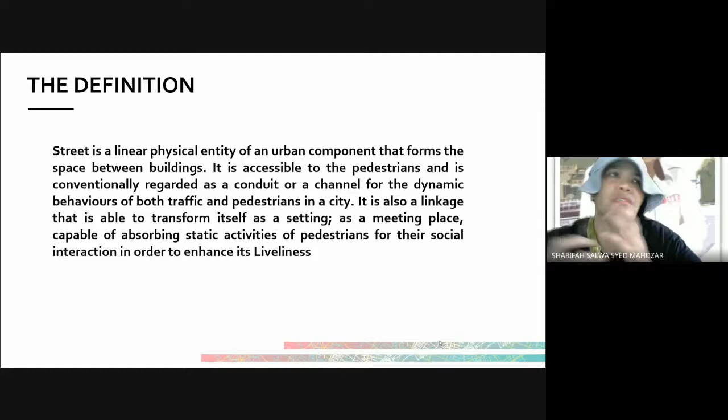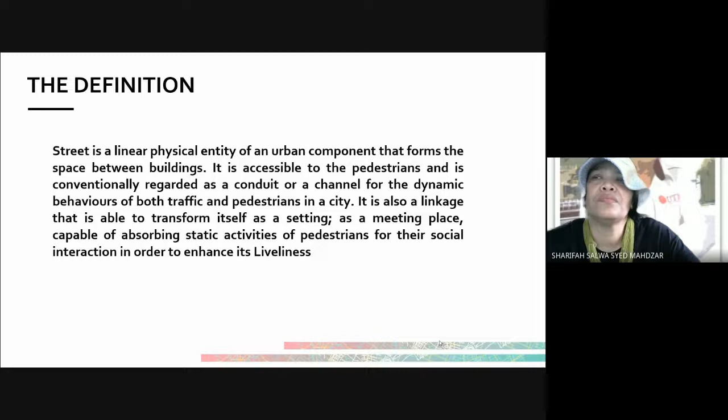Space in between buildings, in between alleys, in between built forms, whatever the built forms may be. Normally we regard streets as a conduit, a channel for the dynamic behaviors of both traffic and pedestrians. But to me, it is also a linkage that is able to transform itself as a place, as a meeting place, absorbing a stationary pattern of activities, and accommodating in order to make it livable.

So, methodology in my work - I think Ms. Shakira also has taught you this methodology using space syntax. I also use space syntax, a very basic one. Those doing research use a bit more than that, but for my masters group, not bachelor, just normal masters of architecture, not research based, it's a very simple approach. We use space syntax, as my work also focuses on static activities. So I integrate space syntax with static activities.

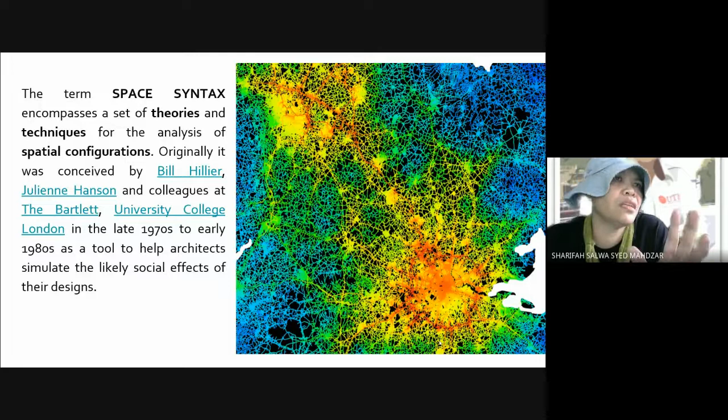I don't think I need to go much into it, just very briefly: space syntax, as taught by your lecturer, is about theories of spatial configurations. I call it a network of things. People talk about this, but in terms of understanding it through the prism of space, not much had been done until late Professor Bill Hillier, Professor Julienne Hanson, and the group at UCL formulated and produced this technique.

Again, network - as the word may sound itself, network is always about fragments. It's always about things that can be broken down, spaces that can be broken down into components. So that's network - in the end it becomes components. That's the kind of theory behind space syntax.

So because of that, there are three main conceptual conceptions of space according to space syntax. The first one - can you see my cursor? People move in linear space, people move in a convex space, and there is always a visual field that a person has already established once one is actually located, having been himself or herself in that space. So already generated a visual field - that is actually the isovist.

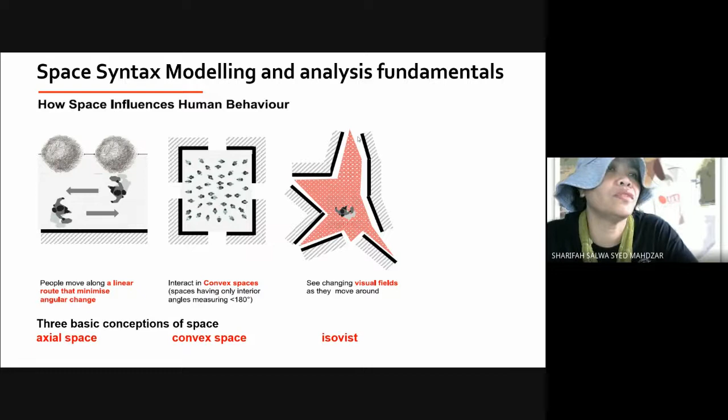All right, so very, very basic work - spatial network analysis of cities in Malaysia. Because I'm from Johor Bahru, I'm currently in Johor Bahru. It's the very basic one, Johor Bahru. This is an old map - of course I have the latest map with more sophisticated spatial data, but this one is very basic, just a general one to see.

This is our main road, Jalan Wong Ah Fook, of course in the district of Johor Bahru. One thing I'd like to highlight - Jalan Wong Ah Fook is the main street in Johor Bahru city center. Along it there is also Sungai Segget, or Segget River, the famous one - those from Johor know this. Now they're doing kind of a renovation.

But what actually excites me on this issue is when I gave a lecture to secondary students, not locals - let's say from Singapore. The lecture was in UTM Johor, and I asked them, 'Do you know the river Sungai Segget, the Segget River of Johor Bahru?' They said, 'What do you expect?' They said no. 'Do you know City Square?' City Square is the shopping mall. 'Oh yeah, okay.' And Segget River is just next to it actually.

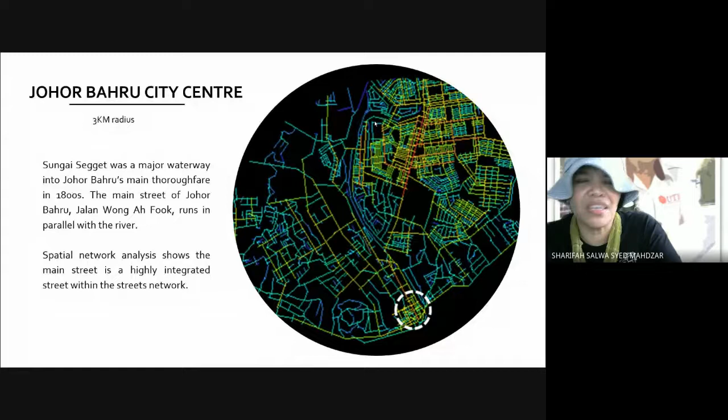So this is what I'm saying about how we design our streets. This raises questions that come back to us as designers. That's why I want to show this: Wong Ah Fook has a very highly integrated street space, but yet Sungai Segget is just next to it, and people do not see, cannot recognize, do not even know the Segget River exists running in parallel.

So this is just a very, very basic GIS analysis - how do you pronounce that? Anyway, this one is a GIS analysis on the Kuala Lumpur city center. Very basic analysis, 5-kilometer radius. We did a spatial analysis based on facts from the Kuala Lumpur city center itself. Just a GIS, 5-kilometer radius - you can see very generally here.

This one is Jalan Tun Razak - where is it? Trying here, it's somewhere there. Oh okay, I think this one is actually KLCC itself. Now you can see this one.

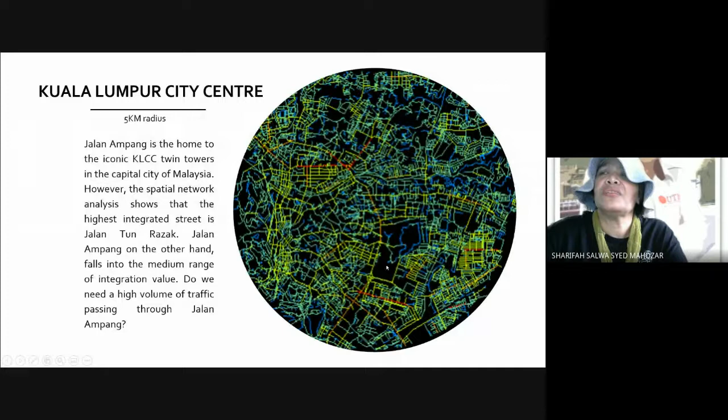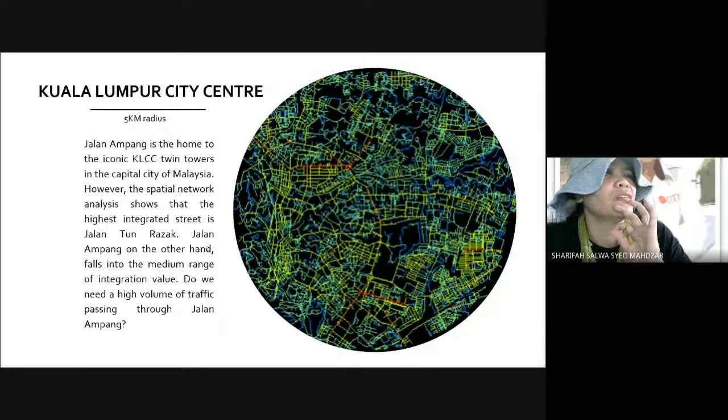So this is Jalan Tun Razak, the question. We see that Jalan Ampang is not so red in this case. During the spatial analysis, we can question whether we will have high volume of traffic on Jalan Ampang. Many of you are in Kuala Lumpur and know how crucial Jalan Tun Razak is. Is Jalan Ampang as crucial as Jalan Tun Razak? Is it the same level of crucial to address traffic? So we can question this as designers. This is what I question from the very basic spatial analysis.

And of course, next to it, as you all know, there's Kampung Baru. Next to it is KLCC, and this is Kampung Baru. Along Kampung Baru itself, we can see several networks which are highly integrated. I believe this class is already familiar with space syntax - yes, Miss Shakila? Okay. So here in Kampung Baru, we see that Jalan Raja Muda Abdul Aziz is a high integrated street, as well as Jalan Raja Abdullah, which is lower - I think the value is a bit lower.

So again we question: do we want, when we have this kind of secondary street, not necessarily primary, but serving as a primary when it comes to serving people - as far as people are concerned they're quite primary, but in terms of the context itself they can be secondary - do we want to have the same volume of traffic in the primary and secondary streets?

So, okay, my Jalan Ampang case study. Therefore, when you question this, I'm advocating making Jalan Ampang a great street of Malaysia - yeah, from my work.

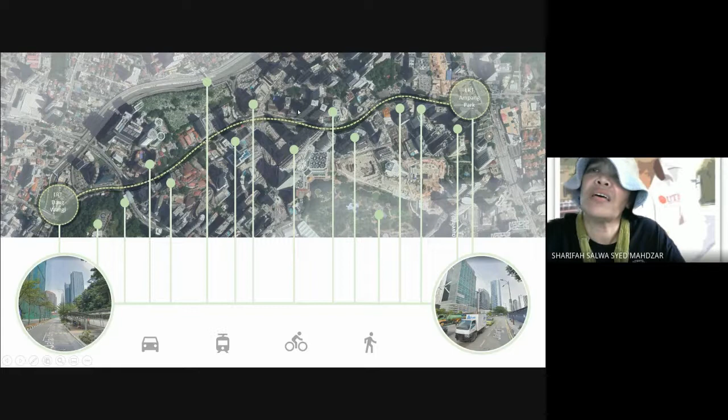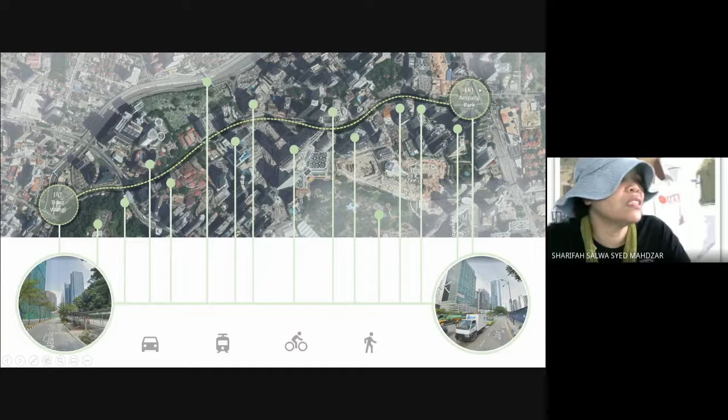So this is Jalan Ampang, the one I've been focusing on, as always from LRT Dang Wangi. There, Jalan Gunus, Dang Wangi Station here. Further down a little bit is where Jalan Gunus is, I think - no, sorry, I can't remember. It's where AIA is actually. Renaissance is here - or is it Renaissance? I think Renaissance is here. Jalan Sultan Ismail somewhere, and then this one is Ampang Park. I'm sorry to say that we no longer have this Ampang Mall - the 70s design being knocked down, which is quite heartbreaking. But anyway, can't do much for now.

So that's the stretch. Looking a little closer, this is axial analysis of the corridor. I'm not using the more sophisticated measures like choice, angular analysis, or segment analysis for this one - bachelor level, I suppose this is enough just to give you an idea, even for my presentation. We can see all this - very straightforward, empirical analysis that gives you a foundation of understanding how the network structure is within a certain urban context.

So this is Jalan Ampang again, and Sungai Kelang over there, Sultan Ismail over there, etc, in 2020. Coming closer, we look at the area - Jalan Ampang is up at 2.59 over here. So we can look at the integration value of this one, of many of the several streets - primary, secondary, and tertiary streets around the area.

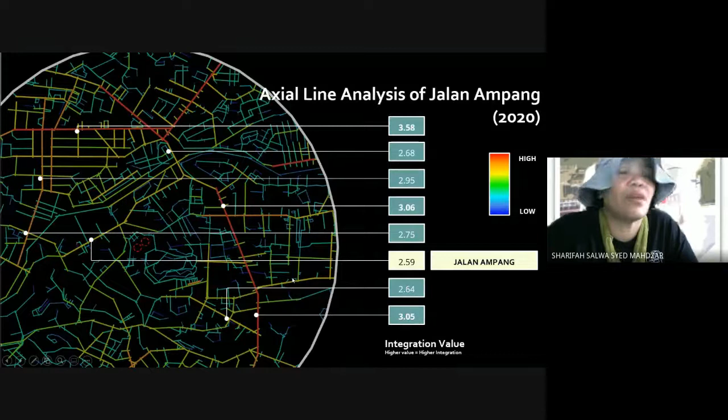Okay, so because of the spatial analysis of network, space and time, we compare. I think it's easy for us to compare the structure of the network of space during those times using archival materials, and we can also compare them to the current condition. Currently we look at 2020 and compare to 1957. I think in 1957 we saw that Jalan Ampang is actually quite high - the integration value is very high. However, in 2020 we saw it's actually quite low.

So that kind of limits the connectivity, hence limits the social interaction, hence limits the social encounter, co-presence of other people, something like this. So that's the analysis, a very basic analysis that we found.

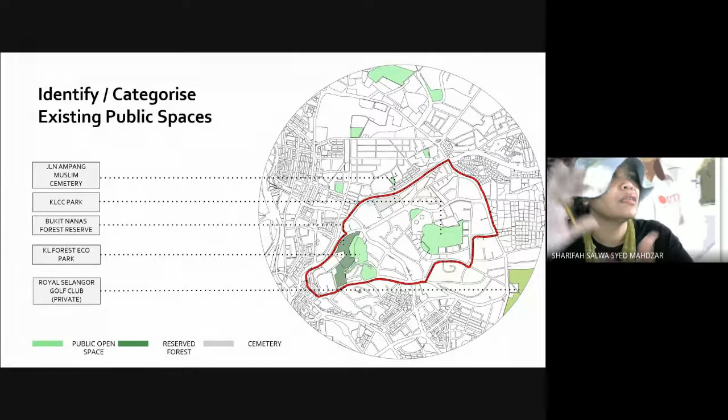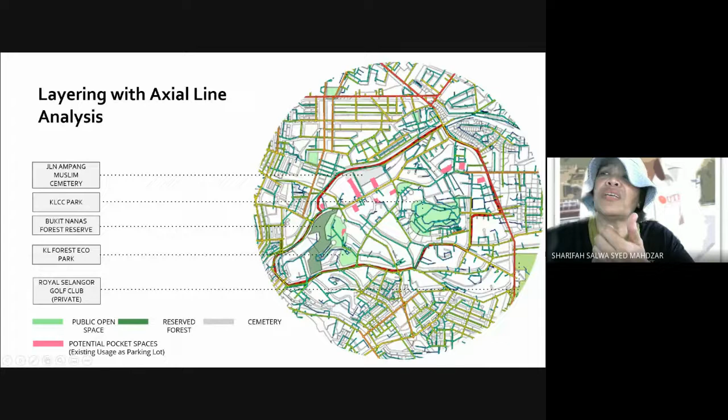When we do this spatial analysis, of course, we can also overlay. I think planning students also do this, right? You layer the analysis. Now we layer the analysis with the public open space, reserve forest, cemetery, and we can layer all these pocket spaces, and then we layer them as well with this axial analysis. And then we can also find the potential pocket spaces that we can develop further in order to enhance the sociability and balance with the accessibility of the streets.

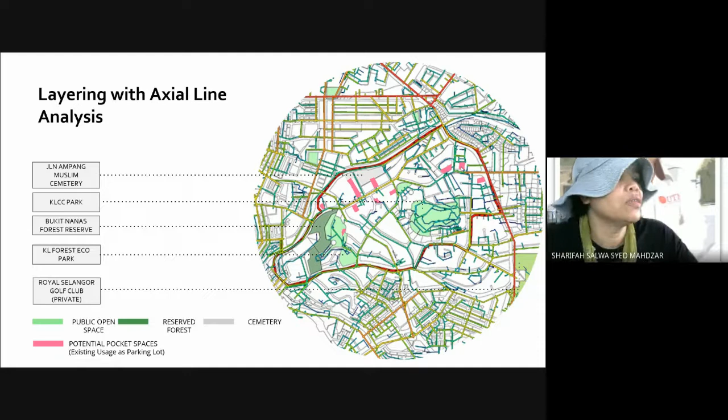Again, when we do that, we do have the synthesis. As architecture students, I think Dr. Miss Shakil also mentioned the planning students now start looking at the 3D dimension analysis, or 3D interpretation of the space they are dealing with, rather than looking at the space, looking at the map in 2D, trying to look at it in 3D. So this is what we are doing as well.

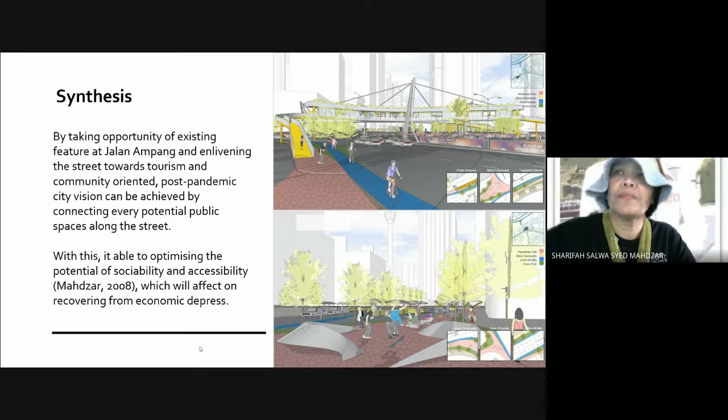So in doing that as well, it's not easy to get this balance. So how do we get this balance between the sociable and the accessibility? Of course, there is a school of thought on understanding streets and everyday life. It is about understanding everyday life rather than streets -- I put streets there, that is my word. It is about understanding everyday life. If you read, there is a kind of school of thought on that.

Therefore, I go on to the static activities. I think we can see this more often. Correct me if I'm wrong, but I think people in streets watch other people, right? I think this is just taking further from what William Whyte mentioned in his book, Social Life of Small Urban Spaces. People watch other people, whether directly or indirectly. But these are static activities, and they are very, very subtle.

A lot of these measures that we come up with, walkability index, etc., are majority about walking behavior rather than static activities. So I am looking into static activities to integrate with a spatial network analysis.

Static observations -- to imagine people watching other people. This one is literally watching other people using a telescope, things like this. And people meeting other people, and I don't know what this person is doing, I think he's just enjoying himself. Whether we can still do that, I do not know. In streets, urban spaces, kids playing, we don't know -- yeah, these are all imagination. It's like what Einstein said, we have to be great in our imagination.

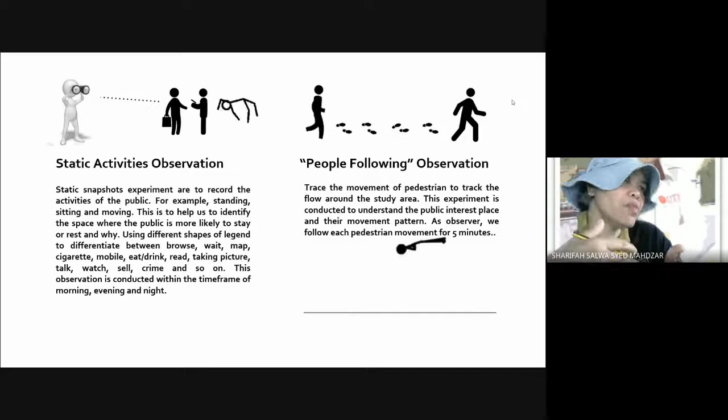So static observation, we map them out. We do observation, and people following -- not just static observation, but also people following. Rather than spatial network doing gate observation, in this case I use people following simply because we need to know where they come from and where they go, and whether they spend time on that street, and how long -- 1 second, 2 seconds, 5 minutes, etc.

So when it comes to people following, I always make this comment to my students: maybe the boys will be like, it's literally stalking people. Whether the boys stalk the girls or the girls stalk the boys, that is up to you, but the point is you have to stalk people for a certain period of time. That's why I love doing urban studies -- you really look at the behavior, can study the behavior of people.

Conclusions based on the findings from my work: tertiary streets acquire better correlation, or are better used by static activities.

In space syntax, when you do spatial network, you need to do correlation analysis. You need to correlate in order to get some regression analysis. 0.5 is mediate, 0.75 is moderate, and 0.9 to 1 is a good correlation.

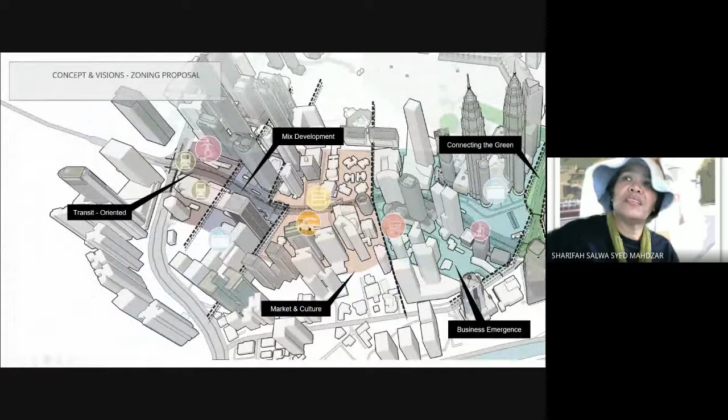So we saw the importance of making streets sociable and accessible. We also relate to static people and crowds - when it comes to pandemic, we need to know how to manage crowds. We can do this with spatial network analysis, and topography, as I mentioned earlier - the physical design, the relation between physical design and the environment. Basically it is about the topography, I call it urban topographies. Topology is actually the spatial network, space and analysis itself.

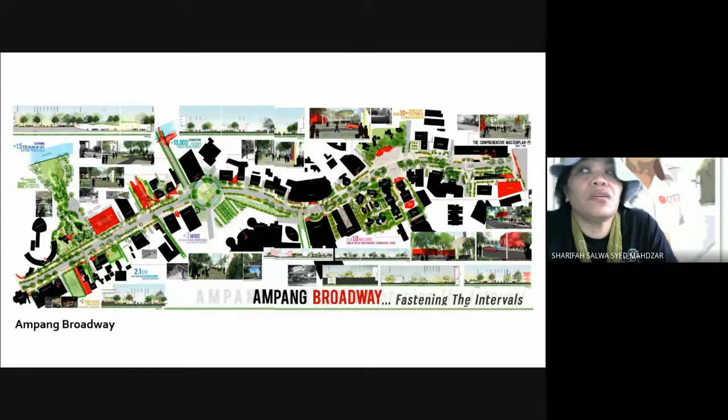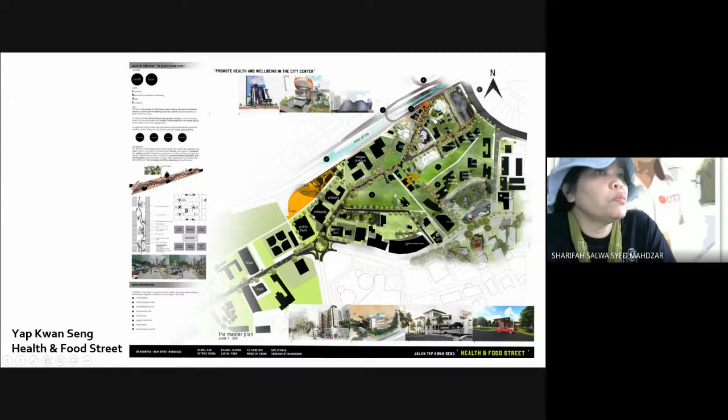Some of you have seen this one, Ampang Broadway, my very first work with my students at the time, so very proud. This is another interpretation of how to make the Great Street of Jalan Ampang. We also did interpretation on Jalan Yap Kwan Seng, because there's lots of food there that people don't know about since it's a bit off the beaten path. Some interpretation on Jalan Raja Abdullah, in Kampung Baru, and this one is Jalan Raja Laut as a greenery.

So what are the takeaways? This is my synopsis for the whole work. Of course, tertiary streets have a quite better correlation in my work. To me, the making of livable, sustainable design of streets must consider heritage, ecology, and contemporary - I call it the contemporary spirit of the soul.

This is about community. When it comes to the spirit of the souls, it depends on who the community is, so we need to relate it to them. As a way forward, we need to bring the community into the spirit of managing our streets.

One of the very important lessons we learned during or after the pandemic is about this micro community revolution. Even now people talk about the 10 minute walk - 10 minute cities are coming out, but it already exists there. I'm sorry if I don't mean to offend anybody, but I think we tend to ignore how important it is to be able to walk 10 minutes to our nearest store or shops nearby. The importance of walking in Malaysia, I don't think we really emphasize it. But I hope, I'm positive, keeping my hope alive.

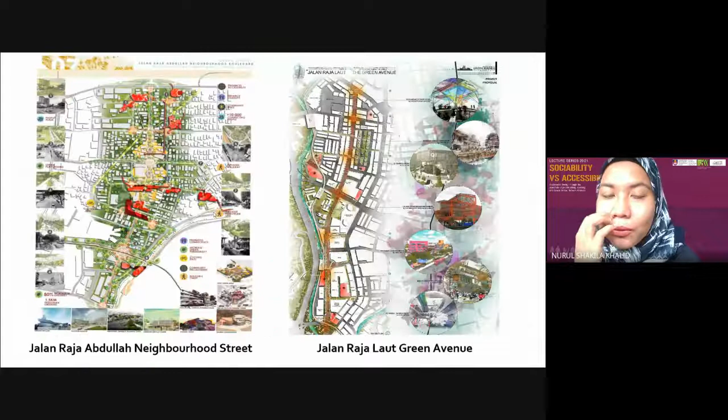What inspired or motivated you to continue the project using space syntax? For me, space syntax is always about giving us the foundation knowledge, the foundation for understanding and describing urban space through network analysis.

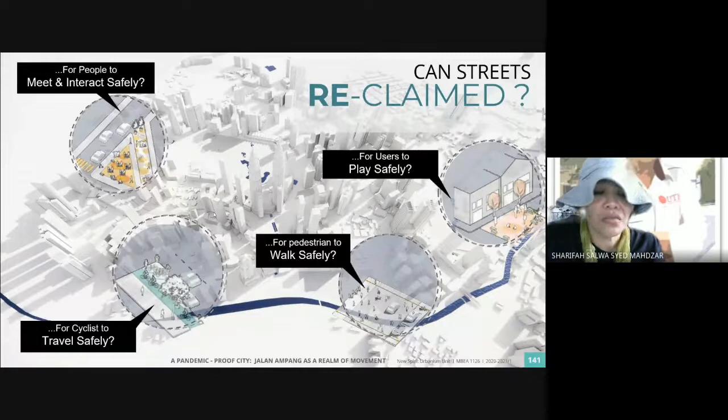What also inspires me is that, as I said, I was from the architecture background. Space is very intangible. Urban space, I think students have problems understanding what urban space is about. Even the definition of urban space could vary so much. So I think because of this empirical data, it turns something intangible into something tangible.

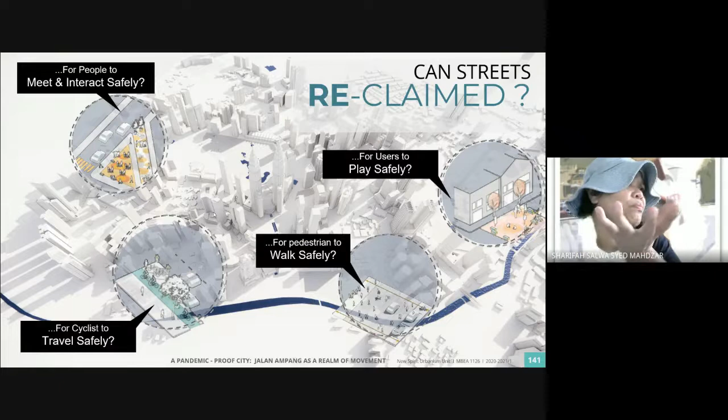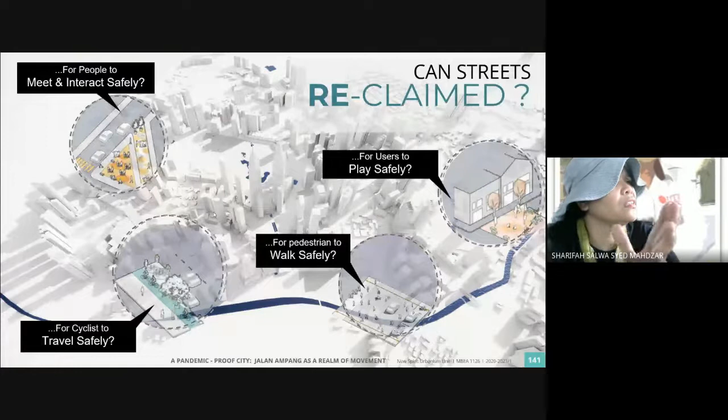Of course, there are lots of debates on space syntax, but one layer of understanding is intact: space, the built environment, cities even as an object, becomes abstract based on the geometry of the spatial form, the geometry of the spatial form of the urban environment. All this we can say. But I think graph theory, graph analysis, has a process of analyzing space, calculating space, the topological aspects and things.

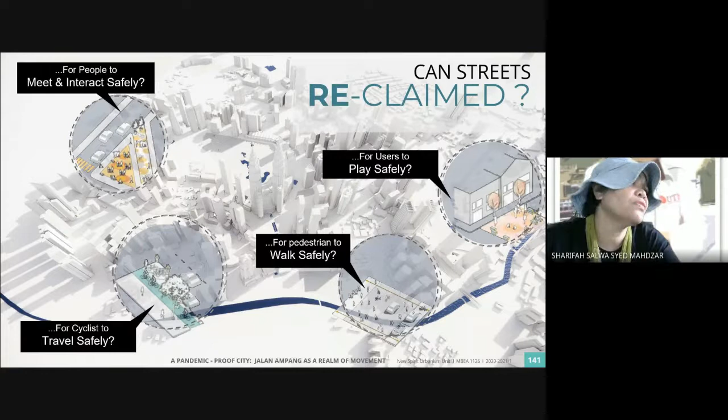I think it becomes a foundation, like when you want to build a house or something. Basically this gives me a foundation of network, of structural fabric, urban fabric structure.

I think we have a response from a student, Izati. From my perspective, sociology refers to understanding society, as planning is also a form of social action. It's about understanding society, understanding the community, the social interactions and so on. Is that okay, Doctor?

That's the answer from the student, Dr. Sharifah. There are a few more. How many of them? A few. I think keep them coming. Maybe at the same time you can give your comment on the answer, maybe add on.

Let's see the second one. Sociology is a combination between the group and the community of human structure that makes it a social group. When we talk about sociology study, we study human behavior, the relationship between the social group and entity. I think that's almost correct, almost there.

It's very, very difficult, it's the same. I think the difficulty to explain sociology in writing is the same difficulty I face trying to explain space syntax. Even the sociability, accessibility, your mouth and tongue go on about all these things.

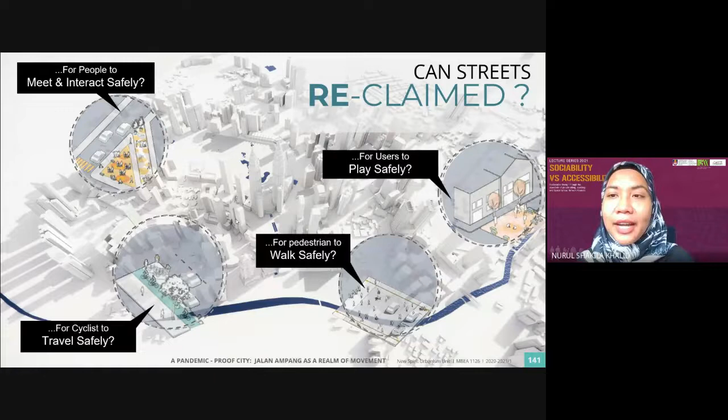Good, if any student still wants to try to give the definition of sociology, you can write in the chat box, later Miss will read it. Okay Dr. Sharifah, I have another question. I think I'm the only one asking questions. I'd like the students to also share their thoughts. Yeah but I don't know. Please, you can ask your questions. But I'd like to hear their thinking, their take on it. Okay please, I'm listening.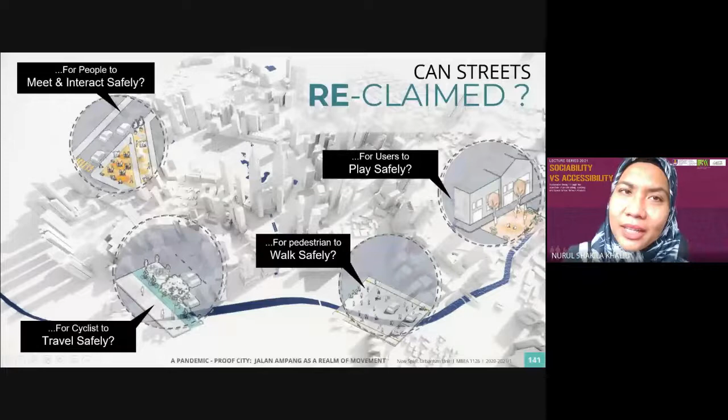By the way Doctor, your background is architecture and urban planning, is it? Yes. So how do you see space syntax will help architects and urban planners in decision making, especially in the design process? How does it help?

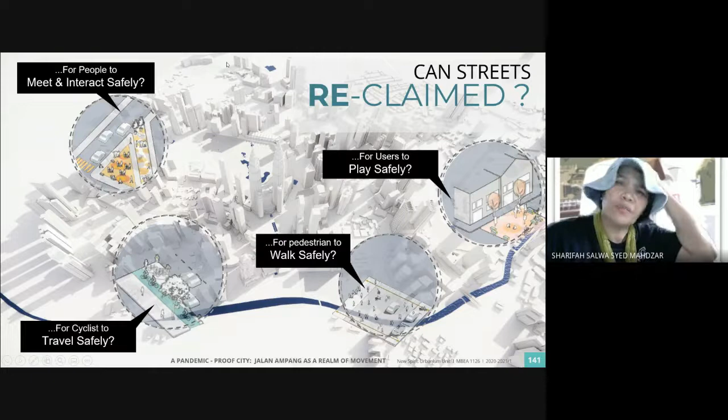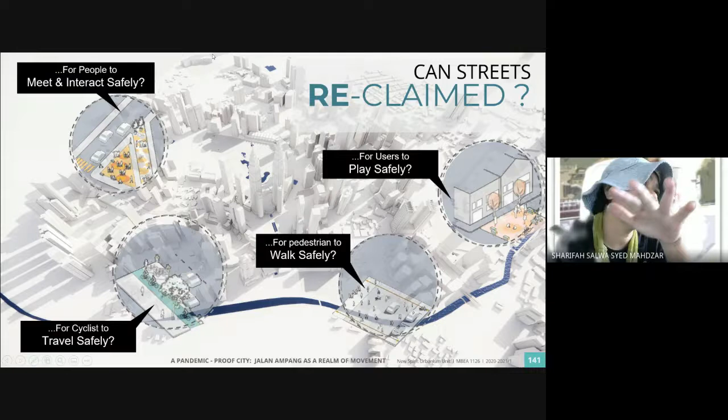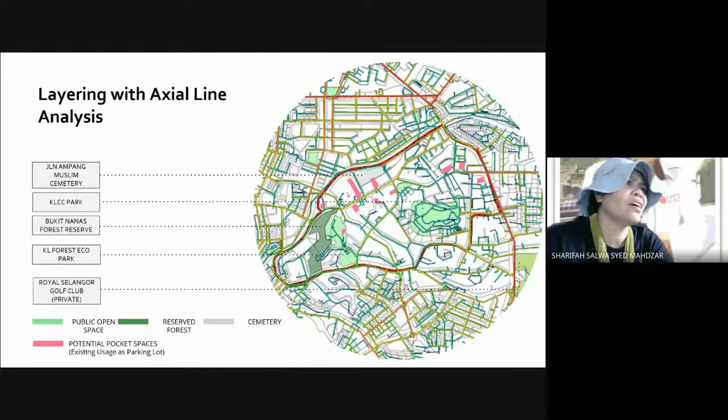Let me put it this way. As I mentioned about the foundation, one of the slides I showed about the layers of development - that's how it works. We layer all this analysis. Let me go back to the slides. I think we can layer that, layer by layer. Before, I wouldn't even think about this layer by layer thing much, until I really tried to understand space syntax and did a bit of GIS and all that. Before that, the focus of space will be layer - so that's how it helps me.

But for me, when you do this, you need to bring in the statistics, you need to do the correlation analysis - whatever GIS now can do, all this stuff. I think Amir is here already, he's really an expert on that one. So basically this is how it helps me. I can't do it without knowing the integration value - again, integration value has its own definition. Of course integration helps us also to recognize the centrality of a space, of a place.

Choice value, as you know, is becoming more sophisticated - there are choice value in depth map analysis. Choice value helps us understand the route that is actually being chosen most, being used by other people. Space syntax also helps us predict the future. For instance, you have one description of urban fabric, urban structure, and then you want to add - in my case, this time we want to add more connectivity, we want to add new proposed sites. So we can do another aspect of correlation, compare before and after, something like this. That helps us, giving us a tool to understand what is happening now and what is likely to happen in the future - so it's a prediction. We can predict the density, something like this, hopefully.

So that's how it kind of inspired me.

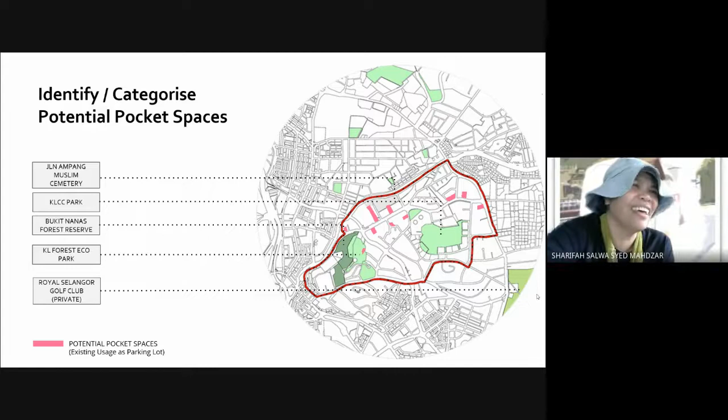So the question was on the street frontage, the street frontage, because we always mention about the street frontage, correct? In your work, do you advocate for street frontage design or not?

I think before, we saw back alleys not being used. In Kuala Lumpur now you can see a lot of this, what DBKL has been doing as well with placemaking, and they took these back alleys. But it's not just that, this has been practiced for quite some time. I've seen some development even at South Bank before when I joined the Space Syntax Group, the back alley. This is activated street frontage, because the back alley is also street frontage. People think back alley is not fronting, but it is fronting the building.

In my work as well, you can see tertiary streets. Tertiary streets are tertiary spaces, for instance. Back alleys are tertiary spaces, something like this. And they are being used more by people doing static activities.

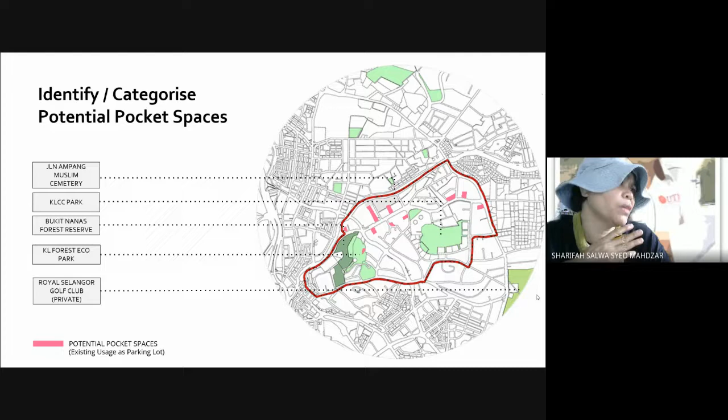If you read Whyte's work, even Jacobs as well, you can see people tend to move away, shy away from a big crowd. That is why when the density of a main street is full of people walking, people try to stray away. So I always question this balance of use, how the interaction happening in the small streets can be distributed onto these main streets. Sometimes even in physical design, the topography placement is actually limited, not really being emphasized or implemented for spots where people can stop and think. It's always the challenge to get people to stop, otherwise streets just become a transit channel.

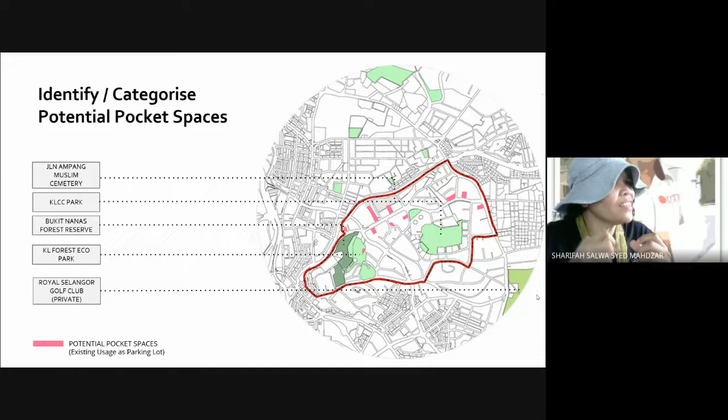It's the same thing currently. I'm also working on the UTM Techno Park project, and we have this old street, Old Pontian Road, parallel to it is a highway, the UTM Skudai Highway, and next to it is Old Pontian Road. So the road has died down, I think it's being left out, ignored, becoming just a transit. So the challenge here is how are we going to turn this street into not becoming just a transit.

From this very basic space syntax analysis, we saw that this street doesn't really function as a main street currently. It doesn't really cater for a huge volume of traffic. It calls for soft mobility, the use of soft mobile transport mode to be used there. The issue of shared streets, Woonerf, students know Woonerf applied in the Netherlands, shared space, shared street spaces can be done. But for me, in order to know this, I have to run my DepthMap space syntax analysis first.

Okay Doctor, if you don't mind, maybe the best example is Jalan Tan Hiok Nee in Johor Bahru. They improved it, I think this is the project by Think City. They improved the street from two lanes to one lane, and then widened the pedestrian walkway in front of the street. It's much better to see people walk instead of filling up the road with parking and all the cars. So I think it's a good improvement in Jalan Tan Hiok Nee.

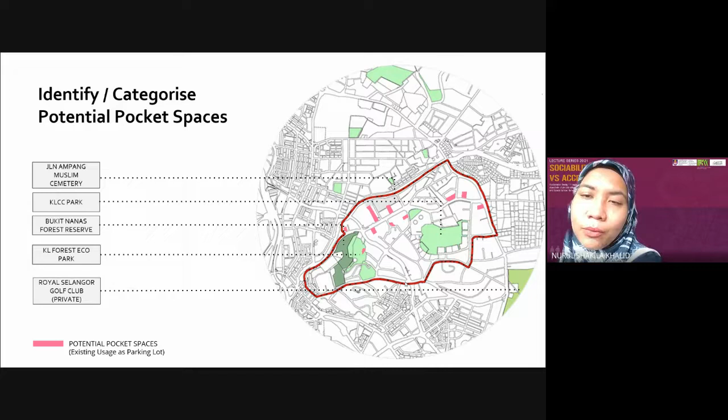What's your comment? For me, for a small street like that, a small district, you don't need to have cars even. You don't even need to have cars there.

Of course, you need to have the lane for the bomba to come in, but you don't even need to have cars. People can still walk, less than a 2-minute walk. There are lots of voids in between buildings as well, so you can walk through. We have to encourage people to walk.

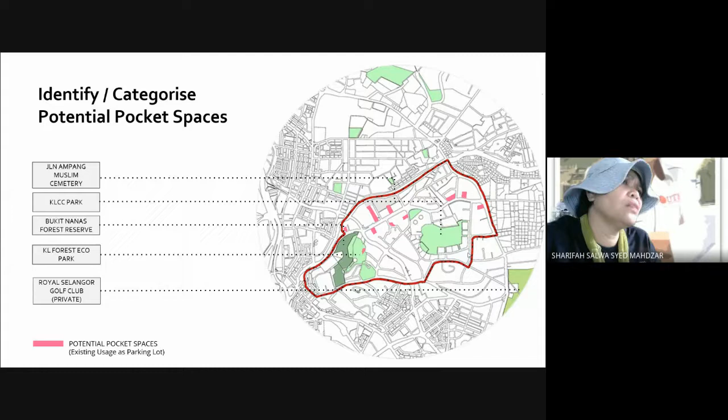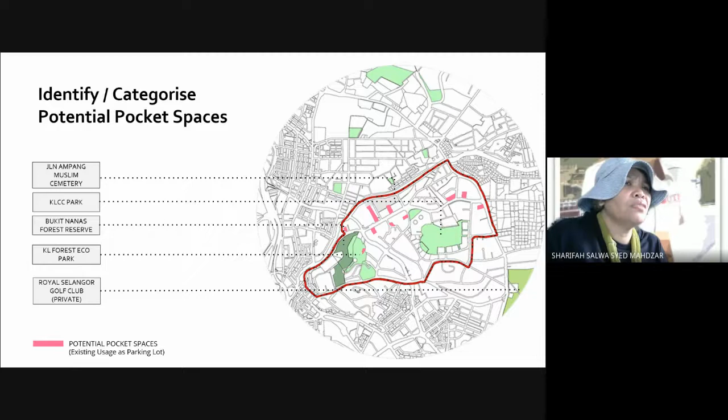Because we cut down our trees, like what I showed you already on Jalan Ampang, the comparison between 1957 and 2020 - you can see how the trees on all these little streets, at a bigger scale, have been chopped down. Trees have their function, correct me if I'm wrong.

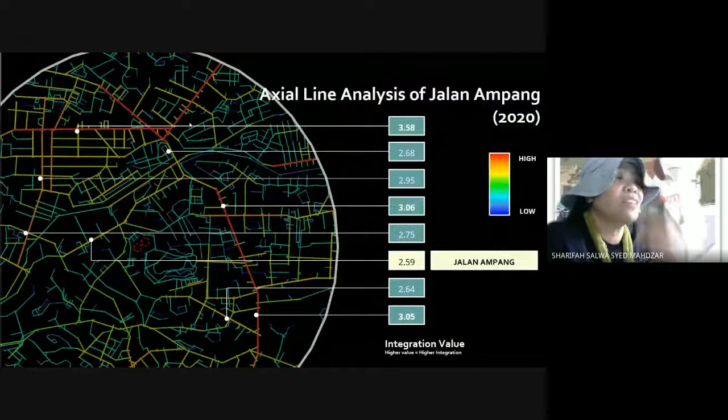It's a shelter. I love boulevards, and I love pedestrian islands, small places, small streets. We don't need to have cars into the space.

I think we need to be really rigorous, we have to be firm where we can go onto the pedestrian street full on, where we can do TAR, like Tunku Abdul Rahman, right? We have a shared street there, it's fine. And Jalan Ampang, I would say, definitely a shared street too.

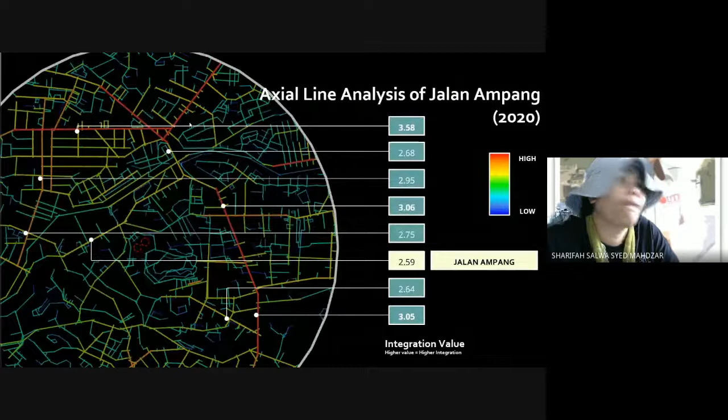I'd like to remind everyone, when Dr. Sharifah talked about the quality of walking, don't forget to reach 10k steps per day to burn calories and get healthier. 10k steps per day, don't forget, okay? I missed my 10K steps this morning because of you.

We have a question from Encik Azlan Arif: thank you for the insightful sharing, and thank you Shakila for initiating this lecture series. My question is less on theory but more on the software itself. I noticed in the video presentation there were animations of huge crowds walking on top of different intensities of the road network. Was the animation generated from Space Syntax as well, or was it a reproduction of the data you collected from static observation? It looks like Pathfinder software.

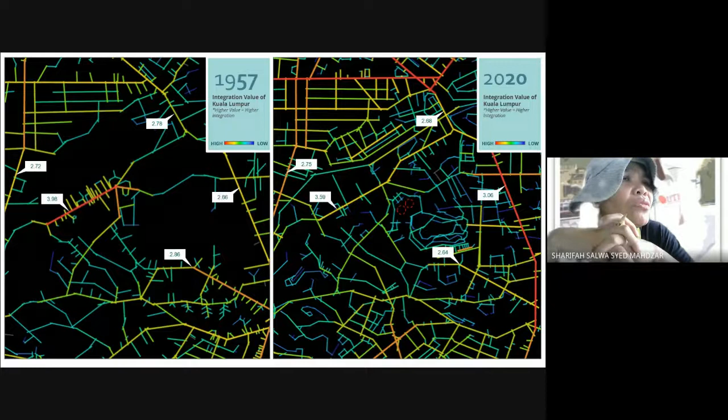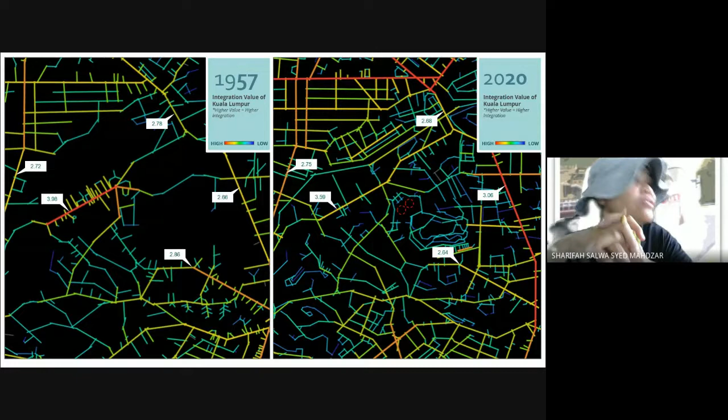At least it gives me the theory and the practice. That's why Azlan mentioned this - not so much the theory, but more about the software itself. Again, space syntax is not just a theory, it is also a method. So space syntax is not just a method, it is also a theory, hence I'm using it for my work.

At the same time, there are other related software. For the axial line we use what's called Axman, but there is also Axwoman - somebody developed Axwoman. There is also Place Syntax by the Scandinavian group, using Place Syntax you can use those. I was currently yet to explore it, so a lot of people can explore based on their research. Space syntax, I must say, it evolves.

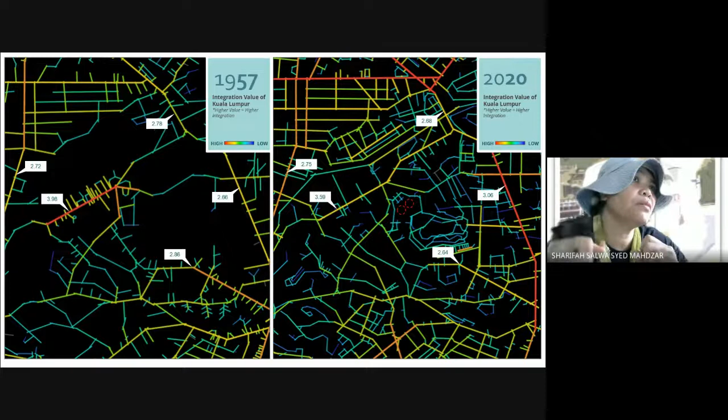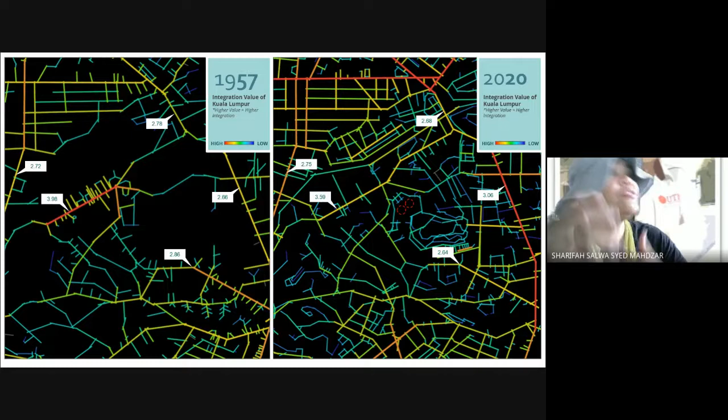Space syntax evolves because it's open source now, right? So anyone can come in and reassess, reevaluate, and redevelop it to a certain level, a niche in the software. I think some planners, like architects, could turn to become software developers. I know some architects, students as well, becoming this. Overseas it's actually quite common now. These days I could see people becoming software developers, rather in terms of the spatial network, not so much onto the other architectural practice profession itself.

Diverse. I believe in planning, urban design, it's a diverse profession. Okay, right? I think Yazlan already got the answer from you, Dr. Sharifah, and we don't have any more questions.

Okay, I think last, what's your tips or nasihat to give to the students for the class, and maybe in future they will pursue their study in master's. I don't know, maybe they want to do some research with space syntax. Maybe some tips or nasihat for the students.

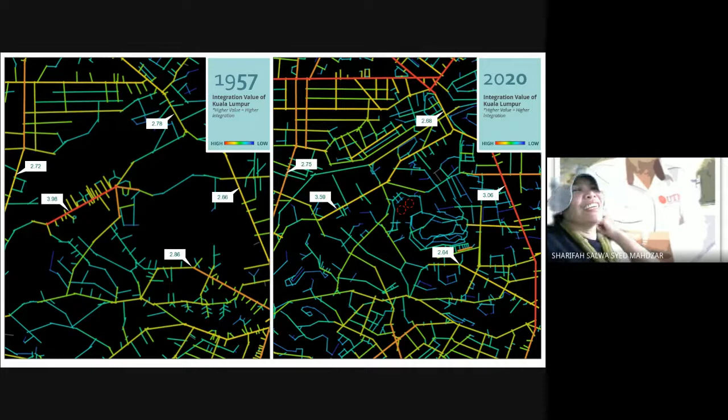Oh okay, there's another answer. Yeah Dr., miss, lambat sikit, you want to read it?

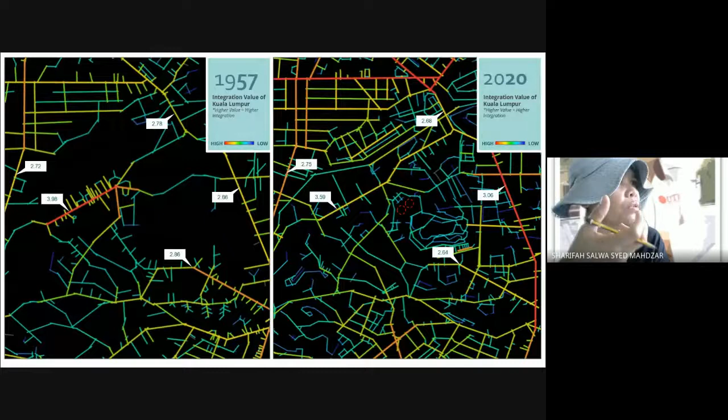That's why for me, when it comes to theory, you want to bring in all these other things. But at the same time, when it comes to the empirical side, I go on to something quite basic, which is just behavioral pattern through static activities, in order to make it more empirical and tangible. But of course, in any research, it opens up to much more further research that can be explored and developed.

Okay, so I hope Dr. Sharifah answered your question, Naim. Thank you for the question. Is there anything Dr. Sharifah wants to add before we end the session?

Thank you, Dr. Sharifah, I've enjoyed it. I just wish during these digital sessions sometimes we could see them. So I think we have to get used to the fact that we don't really see our audience much. But I think it's good.

We have how many questions so far? 5 or 6 questions, which is great. So that's good already. But I just thought maybe some of us, Archie, I don't know whether he's still around, might have something to say.

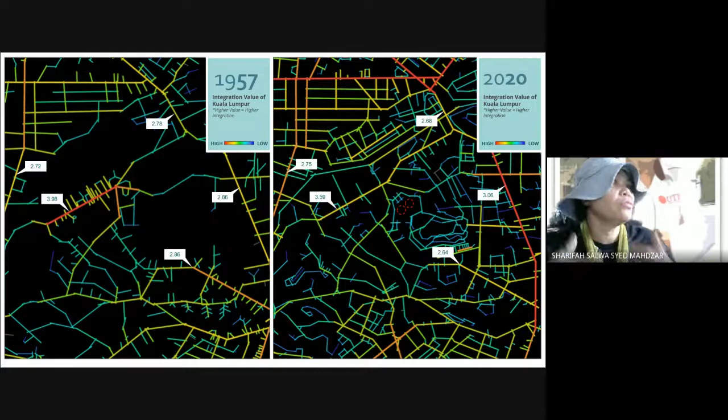Amir, if they want to say something, it would be great to have a panel session. Maybe we can take this further to discuss, because I'm quite passionate about making Jalan Ampang a great street of Malaysia. KPKT is also looking into this, hopefully, because I need to know. This is my sociology, my science of society, how I want to investigate, so this is also a data collection process.

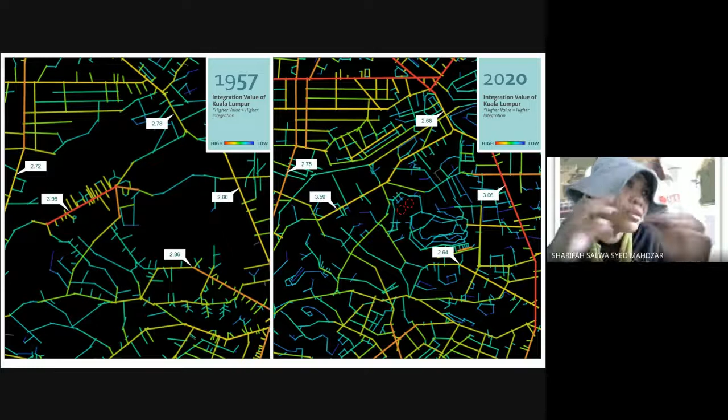At the same time, I'm hoping we have a session. My question will be another column asking what do you think about the advocacy of making Jalan Ampang a great street of Malaysia, a national street of Malaysia. I know Lilian Tay is as passionate as me, and she was surprised when I first mentioned Jalan Ampang. I think we need it, and Jalan Ampang itself is historically very long, with lots of history which needs to be unraveled, celebrated, and made into a national street of Malaysia. But I do want to hear the students, and I hope we have a column that you can share with us later on.

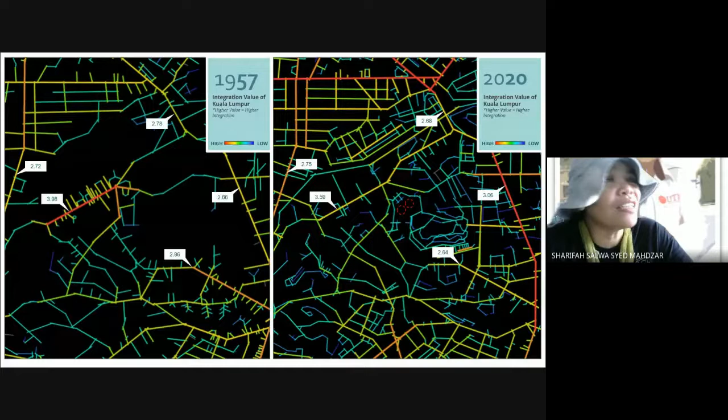That's it from me for now. Sure, boleh boleh, later I will share their answers with you. Good luck students, and try to convince others not to cut our trees.

Doctor, maybe you can share a link or your platform so students can reach you, or review your project or research. First of all, let me go to the very first page.

They can get access to my Facebook, and here, people can access this UTM page, my scholarly writings and references there, as well as my ResearchGate. You can get access from the UTM page. I also upload some materials, and I'd like students to listen to the YouTube.

If you don't mind, one minute. Sure, no problem, Doctor. I would like the students to listen to my talk during PAM about Ampang Great Street, and I hope they can listen and give feedback on it.

Hang on, what is it? YouTube, PAM Ampang Great Street. Hang on, one minute, one minute, you can share the link in the chat box. Yes, I am looking at the link now. Okay, good, PAM Ampang Great Street.